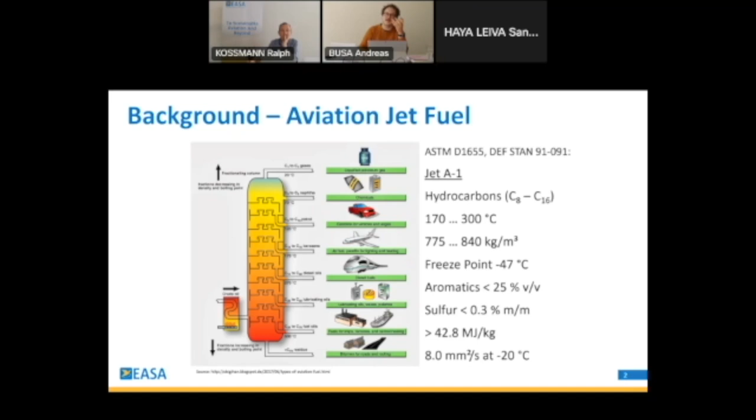And within there, you have the Jet A1 fuel, and this is basically a range of hydrocarbons. So everything is basically set into ranges, right? So you have a range of boiling points that need to be met, density. The aromatics have to have a certain maximum value, the same with sulfur content, etc. And in there, you have your aviation jet fuel. And how does that then evolve to what we are talking about today?

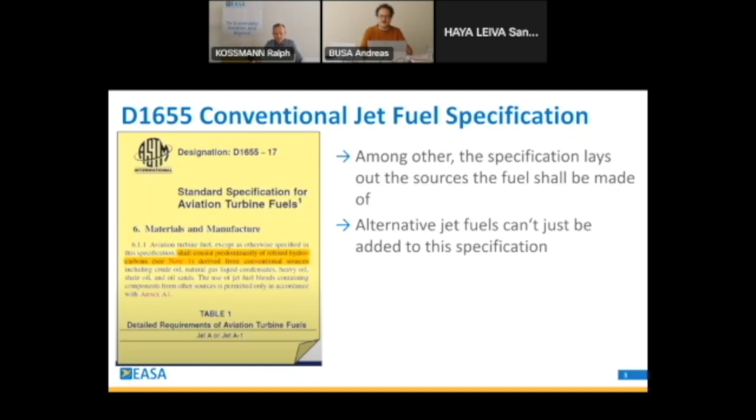The main reason is that within the D1655, which is this Jet A1 jet fuel, among all the properties that are defined that I showed you in the earlier slide, it already says in this specification what this fuel should be made of, and it shall be predominantly made of hydrocarbons derived from conventional sources. So based on that wording alone, you cannot just add an alternative jet fuel that is made from biomass or from something else to that specification. So the global aviation standard community, of course, had to deal with that. So that brings us to what we will talk about today.

Aviation fuel approval is tied to the aircraft and engine type certificate. So an aircraft is certified to operate on a specific fuel, in this case Jet A1, Jet A fuel, which is the conventional jet fuel specification, right? And let's assume you are a producer of a novel jet fuel. You have to go through a specific process, which is the D4054 industry process, to determine that whatever you are producing is equivalent to conventional jet fuel, so that it can be safely mixed with conventional jet fuel. Because everything that we are talking about today refers to drop-in fuels, which means that they are basically equivalent to the Jet A1 fossil jet fuel. They can be safely mixed, which means that they can be used in all existing aircraft today.

So as I said, you have to go through this process. And after this process, which I go into detail on later, if determined equivalent, a new annex will be added to the specification D7566, which is the drop-in fuel specification within ASTM. For each novel pathway there's a specific annex, which lays out how it should be produced, the feedstocks that can be used, and all the other properties.

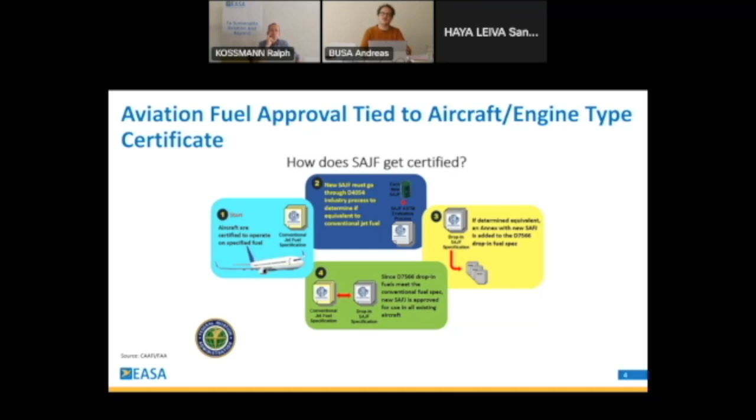And since these D7566 drop-in fuels meet the conventional fuel spec, as I said, they can be safely mixed. They're basically equivalent and hence are approved for use in all existing aircraft without the certificate for the aircraft or engine type needing to be changed, right? Otherwise the process would be much longer and very cumbersome. So basically, if you are added to D7566 or you are producing a fuel that refers to those in D7566, that means you're equivalent to Jet A1, and you can be operated in all existing aircraft.

So the question is, of course, how do you come to that point? As I said, this process is called ASTM D4054, and I will show you a lot of those beautiful process diagrams. The main thing is basically a testing program, right? So you have different kinds of testing, which I will show you in a minute. A lot of chemical evaluations, specific specification properties, and depending on where you are in the process, you need more fuel and more time, and more money, of course.

And one important part, of course, is the OEM review. So the results of those tests are reports that then go to the OEMs, the engine manufacturers, for example, that review those reports in order for it to be balloted within ASTM, so that a new specification can be added.

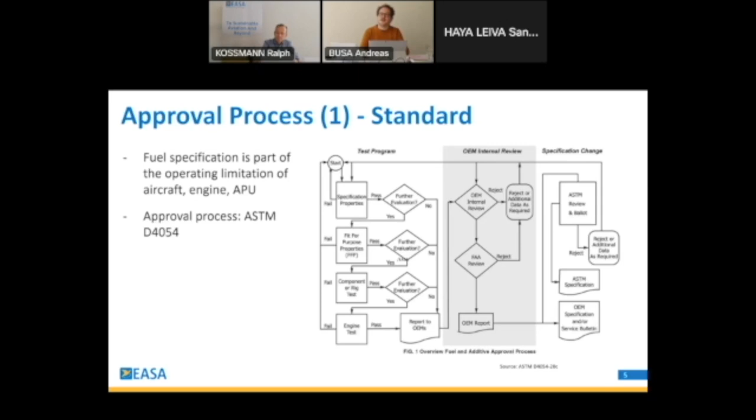So this shows you a little bit better what I'm talking about. So you have two phases basically. Phase 1 is tier 1 and tier 2 testing. So we are talking about just a little amount of fuel, which looks basically at specification properties, but I have another slide with more detail on that. The end of phase 1 would be a research report that then goes to the OEMs, and they will then decide whether a phase 2 is even necessary. So what you can see here doesn't mean that all of it needs to be done in order to get a new fuel added to the specifications.

But if it is decided that there needs to be a phase 2, then there's component rig testing, actual engine testing, another research report, another OEM review, and then finally that would go to the ASTM balloting process.

Andreas? Yes. I know a big challenge is to hold a very long monologue and speak into this little box in front of you. If you want, I can drop you a question here and there in between, but I would leave it up to you. Just let me know if you're ready for a question. I can pose it, or I do it at the very end. What would be your preference? I would continue first until the first chapter is done, and then we can have questions. All right. Sorry for interrupting, Andreas.

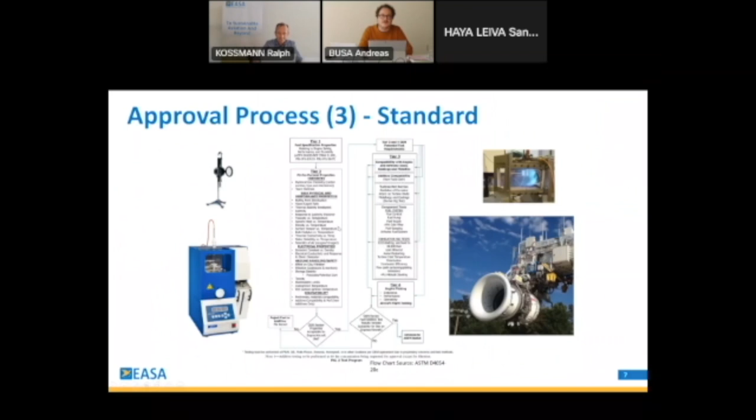For a second, interrupting, Andreas, there's a zoom function on the very top of everybody's screen, where you can zoom in and increase the percentages. Sorry for interrupting again, just technical information. I don't see it, but well, maybe I can do it with my touch. If you can do it for the audience, great, but every participant at their own screen should be able to just zoom in and zoom out. Yeah, so maybe you can see it better now.

Anyway, so tier 1 and tier 2 on the left side is basically this phase 1 that I talked about earlier, and on the right side you have tier 3 and tier 4, and you can see that especially in tier 2, the fit for purpose testing is a lot related to chemistry, so boiling points and lubricity. I'm not an engineer, so I'm reading that now, but you get the gist. So a lot of testing, a lot of comparison against temperature, just to see that the fuel that is evaluated is fit for purpose.

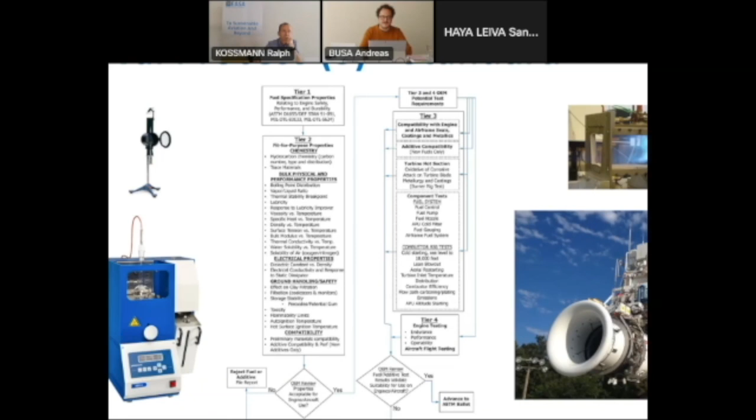And then you have this research report and OEM review. And they basically say, are the properties acceptable for aircraft engine use? And if yes, it might go to tier 3 and tier 4, which is then already at the OEMs, and they define the potential test requirements. You have tests that ensure that it's compatible with the engine and airframe seals, turbine hot section component tests, from the fuel system to the combustor rig tests, etc.

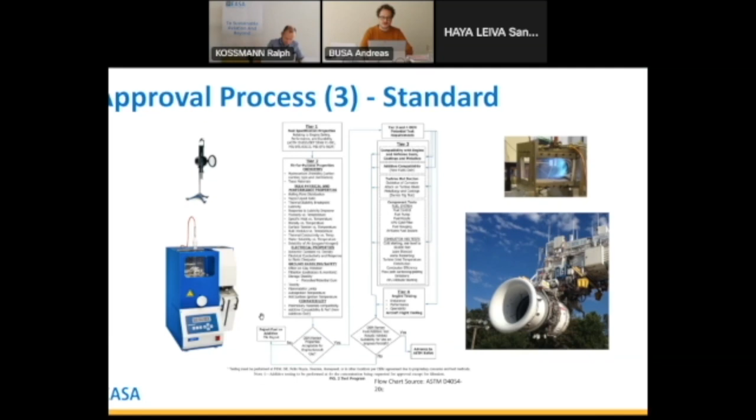And then the last test is the actual engine testing related to endurance, performance, operability. And then again, as I said, the OEM review. And if that is then approved, then it goes to the ASTM balloting process. So just a second. All right. But that's not all. There's another way to get your fuel approved within the annexes of D7566, which is a fast track process.

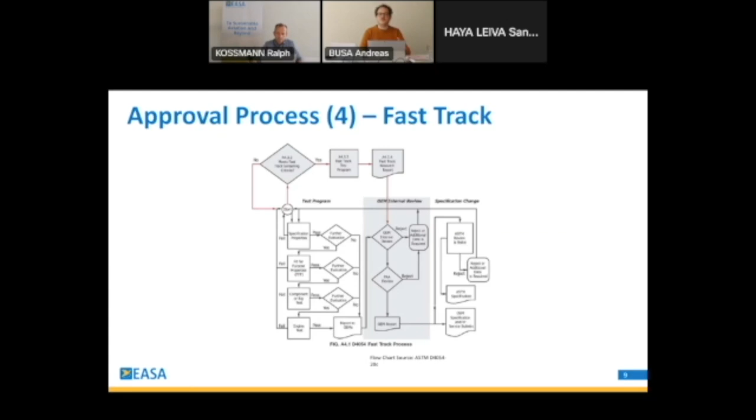I'm not reading that all, but what it basically means is, again, the picture from earlier. If you have a fuel that meets the fast track screening criteria, it means that it's even more equivalent to Jet A1 fuel. You could get it approved much faster without the rigorous testing, without so many review steps, etc. So you can see it here on the top. You can basically skip a lot or all of the testing. You have a different testing program and then go directly to the OEM review. But go back one slide, you can see it here at the bottom.

Using this fast track means, at least at the moment, that a maximum blend limit of 10% will be imposed on this fuel. I have not touched upon that yet. All the certified production pathways have a specified blending limit. At the moment, the maximum is 50%. There are fuels that meet that, and there are fuels that have less. I will show you that in a second with an overview of all the fuels. But for fast track fuels, the blend limit of 10% is the maximum.

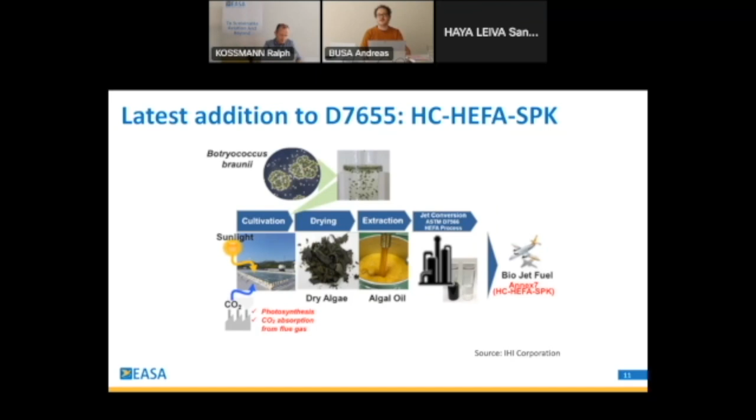And yeah, so this is not only the first fast track, it's also the latest addition to the annexes. And you may have already heard, and I think I had that also in the earlier presentation in January, about another production pathway that is often talked about because they offer at least potentially the highest carbon emission reduction potential, which is power to liquid or e-fuels and synthetic fuels. They're all kind of names used for basically the same thing, where you have electricity and CO2 and water in order to produce something called syngas, and that is then processed via different conversion options into jet fuel.

And if the conversion option that you choose for your power to liquid would be a Fischer-Tropsch conversion process, that would mean that it's automatically approved under ASTM, because we have Fischer-Tropsch already approved as a production pathway within ASTM. So you could say only the feedstock changes, and the actual production process of the fuel is the same. And ideally, to minimize the carbon intensity of the production process, the CO2 source would be carbon capture and utilization, basically capturing from the atmosphere.

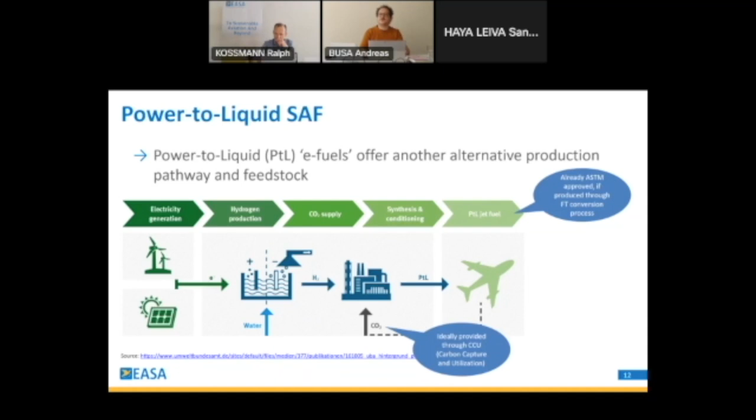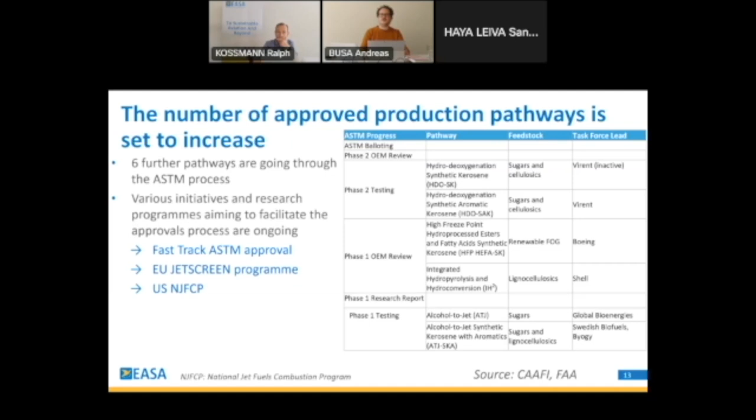But that's not all. You see on the right the number of production pathways that are at the moment within this ASTM qualification process. So you see that we have 6 different, or one is inactive, so 5 different fuels going through the process now. So we will maybe have more annexes added in the future and more options to produce SAF. And as I said, there are various initiatives and research programs to facilitate this, the fast track program, but there's also the EU JETSCREEN program, which I'll come back to in a minute. Since I'm now going to another topic, we can have some questions for the first half.

Good, thanks, Andreas. We have Robert posing 2 questions. Robert, thank you also for that. I think the first you have briefly touched upon already, Andreas. Let me just read it as he was writing it. What is the timeline to obtain ASTM certification under the normal approach and fast track?

Okay, yeah, it can take years, unfortunately. I think it all depends. I come to that in a minute. So maybe the short answer is it can take a long time, and it can take a lot of resources. Fast track is of course faster because you need less testing. But I will come to things that might help that process in a second. So I understand you will touch that subject later as well. Is there probably some kind of orientation in terms of timing, without being overly precise? Any rough estimate from your perspective? I don't have any concrete numbers at the top of my head, but I guess at least 2 years could be a good estimate for how long that process will take.

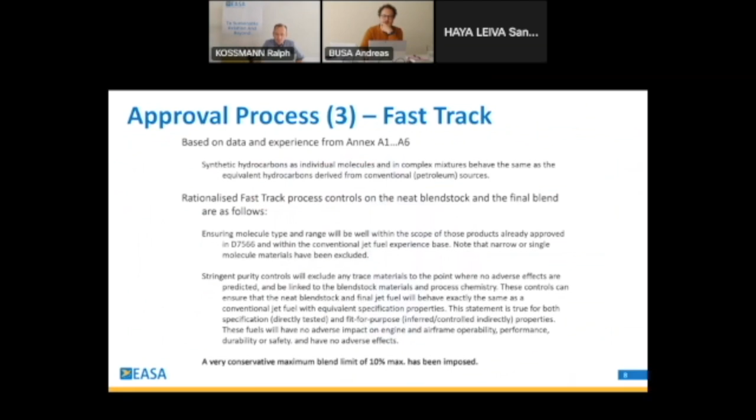the body that certifies or qualifies that fuel is ASTM, and ASTM is a standardization body. It's situated in the US. So at least for the fuels that we are talking about today here, ASTM, as I said, is the globally accepted standard. You have national standards, but they're basically all based on this one, or the DEF STAN from the UK.

And it's open to everyone, so there's a balloting process in the end. Basically, you have gone through all the qualification processes, which is also defined by ASTM, which I said is open to everyone. So it's a democratic thing, basically, to come up with the qualification process and also the balloting process. So within this ASTM, once you're ready with your fuel and with your reviews and research reports, you go to the ASTM review and balloting process, and they will then basically accept or reject the new annex or the new fuel approval.

And once it's accepted, it goes into the specification D7566 as an annex. So we have 7 annexes today, so the next one would be 8. Basically laying out how the fuel should be produced, and once it's produced through that, then it's fit for purpose.

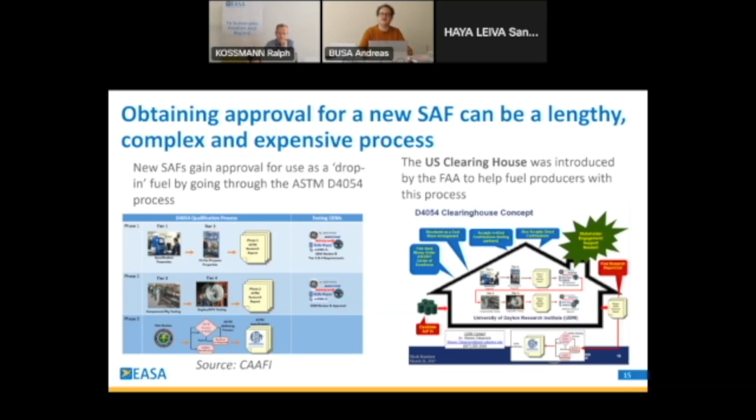So the idea of a clearinghouse was established in the US to help fuel producers with that process, and I will take the second half of my presentation to guide you through what that is, and also an EU proposal on that. So what is a clearinghouse supposed to do? In one word, it supports fuel producers wishing to certify a fuel to ASTM standards. So it provides guidance to potential fuel producers on how that actually works.

It carries out tier 1 and tier 2 tests by receiving the fuel samples, and in the US it's basically funded through FAA and then through the clearinghouse. And of course, it liaises with and funds also OEMs to review the research reports that are produced after testing.

What that means is, from that standpoint, it simplifies the process quite a bit for new fuel producers. So it basically is a one-stop shop. You come to them, you get guiding communication with the key stakeholders, particularly the OEMs. It provides access to the testing facilities.

And as I said earlier, there are also pre-screening tools available that de-risk this evaluation quite a bit, and also the cost. In the case of the JetScreen program, which was a Horizon 2020 funded research project in the EU, they developed what they call tier alpha and tier beta, which is even before tier 1 testing. So you need even less fuel, which is of course cheaper to produce, to already have an early estimate on how your fuel would fall into the specifications.

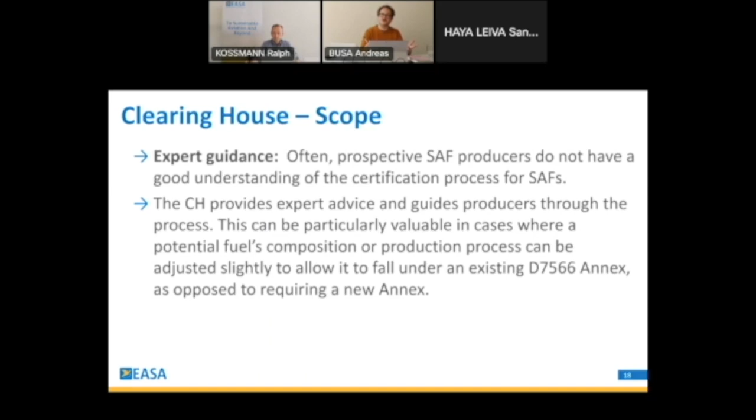Let's assume a fuel producer comes to the clearinghouse with an idea on a new fuel and already produced a first batch, and it shows that a slight adjustment of the production process would mean that the fuel would fall under an existing D7566 annex, as opposed to requiring a new annex. That of course will save a lot of money and a lot of time, because the producer could already go ahead and produce the fuel according to the existing standard.

Of course, time savings with the clearinghouse subcontracting OEMs to review the research reports. The availability at the OEMs is also limited, so it can be better managed when they are ready to review the research reports. But I wrote it also here, it's not the main delaying factor to get the fuel through the process.

The main delaying factor is historically that the producers have difficulties in producing the necessary amounts of fuel for testing, and we are looking at a lot of fuel for the later tests. I should have added a slide actually on how much fuel is needed. I could add that to the presentation once Ralph distributes that at a later stage.

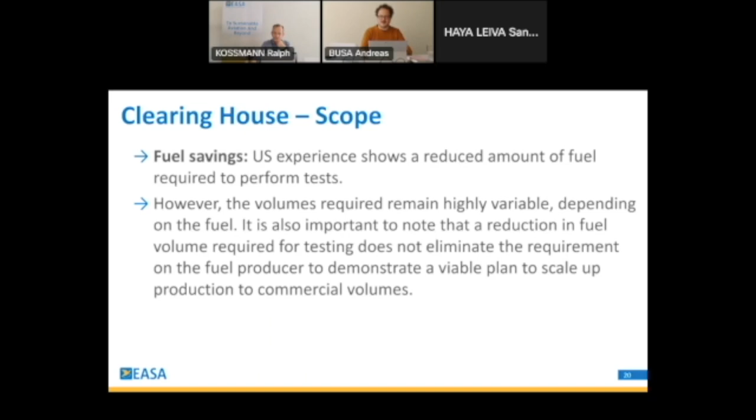But at the same time, with more experience, it can also lead to fuel savings, because with all the testing going on, and the research facilities doing that, they know what they are looking for, so maybe less fuel is needed. And it's still, of course, the fuel producer who would need to demonstrate how to scale up the production to commercial volumes, so that it would not be stuck forever at research laboratory scale.

So what I talked about now is basically what the US clearinghouse is doing, which is at the moment the only clearinghouse for alternative jet fuels. It was established in 2016, but it builds on significant pre-work. There was work already done a lot of years earlier, and the clearinghouse is placed at the University of Dayton Research Institute. And as I said, the goal is to remove as many barriers as possible to certifying a new fuel.

And as I said, it builds on pre-work, and the certification work was already done before establishing this clearinghouse. What we at EASA did is we commissioned a study a few years ago. We published it last year or 2020, I'm not quite sure, but we commissioned a study to investigate a SAF facilitation initiative, basically to assess the current status of SAF in Europe.

And at the moment, SAF in Europe is, I think, 0.05% of fuel use, so it's very limited. And to determine how this could look like, and also assess the feasibility of having an EU clearinghouse, modeled after the US version of the clearinghouse.

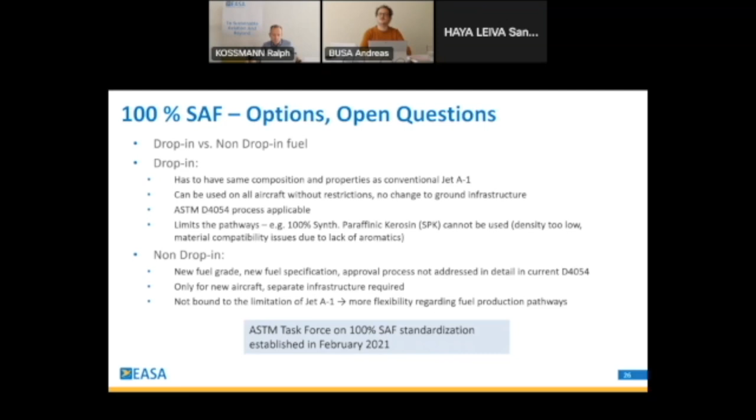And the ASTM has established a task force, which is, again, I think, open for everyone, on 100% SAF standardization. It was established in February 2021. And I think one of the goal dates is that by 2030 or so, that 100% route is established.